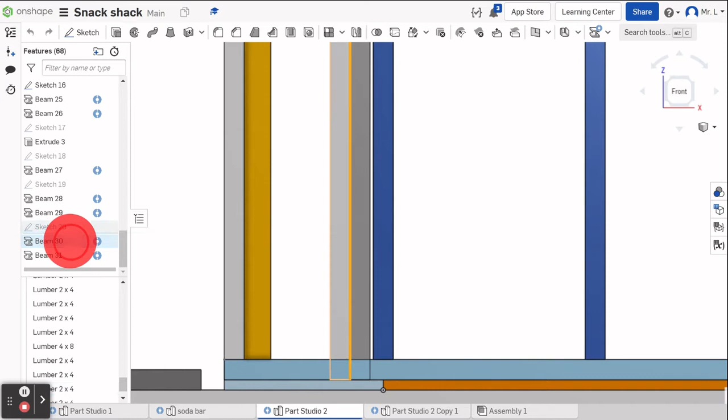So I think we can fix that by going over here and figuring out which beam. I'll go to beam 30, open that back up, and put trim, and click parts to trim to. Does this help having this red circle, or is that distracting? So parts to trim to, and we're going to trim to this part. Awesome, that did it. Green check.

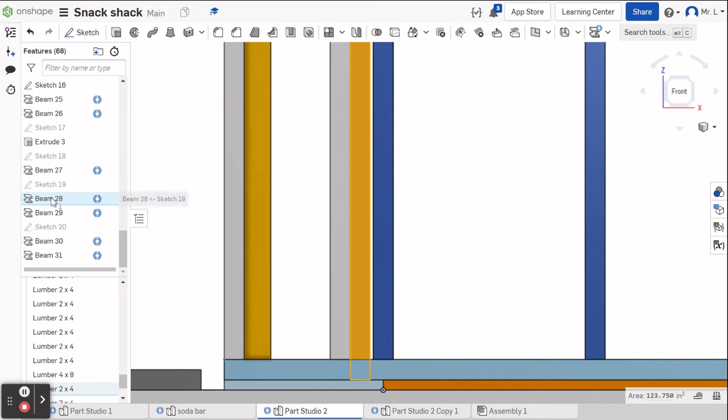So we're going to need to come to these beams at the end. I'm going to click on this one, and that is beam 28. We're going to double click on that, put trim and parts to trim to. You can either trim to a face or to a part. For this, it's easier just to trim to the part. So we're just going to click the part that we want to trim to. Green check. Let's see if there's any others.

Yeah, these two over here on this side need it as well. So we're going to click on that one, and that's beam 29, parts to trim to are going to be... trim, parts to trim to, there we go, green check. Last one here, what is this one, 31. We're going to double click on that, and once again click trim, parts to trim to, and green check.

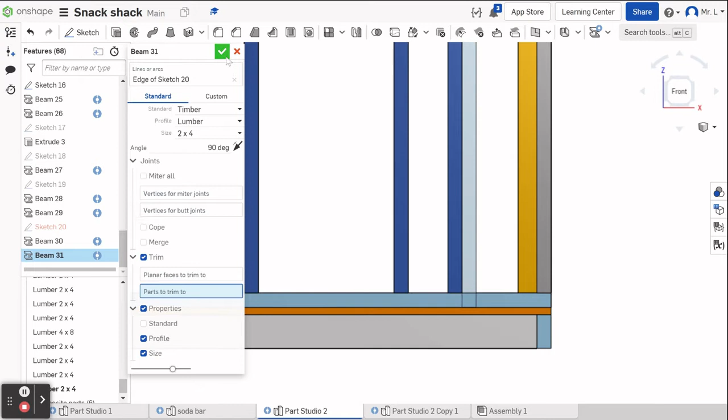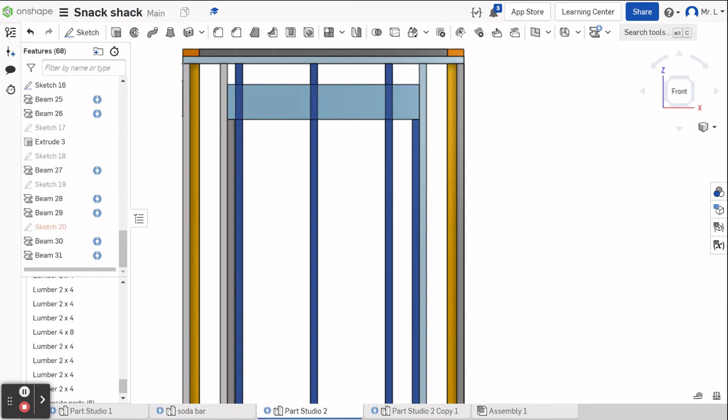Okay, so now if we look at this, we've got pretty much everything that we want here, but we are going to need to trim out everything... oh, this one didn't. All right, so click on that, which that's 31, trim. Oh, I didn't select the part to trim to. There we go. Green check.

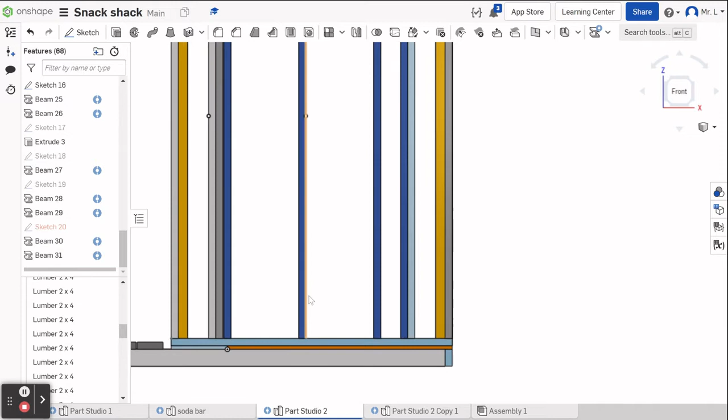All right, so now we need to get rid of these studs that are inside our door and the sill plate where the door is.

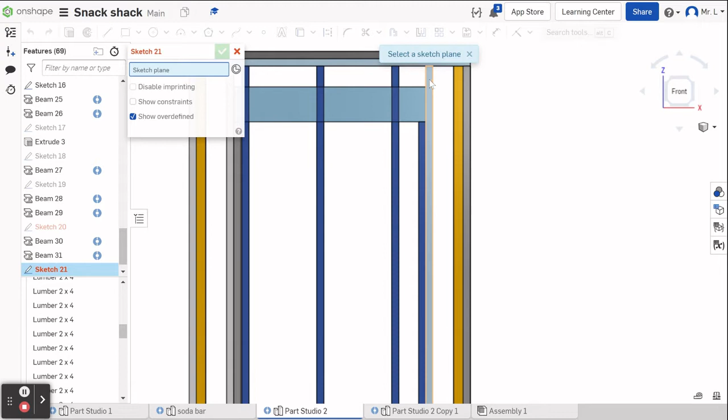So we're going to do another sketch, and I'm just going to do it on the face of one of these studs. It doesn't really matter which stud because they all should be the same. Then I'm going to do corner rectangle, and I'm going to go from this corner right here. I light up the edge of that stud and the top of my header, and I'm going to drag it down to...

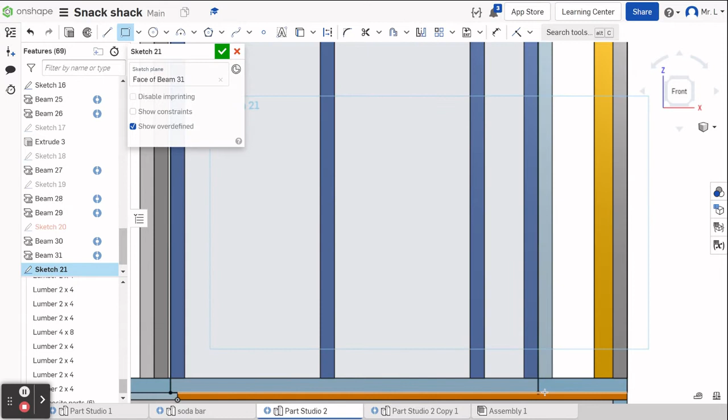I know all the scrolling in and out that I do, it's really difficult if you don't have a mouse, but I'm going to line that up so it's in line there, and then I'm attaching it right down here at the bottom, and then I'm going to go green check.

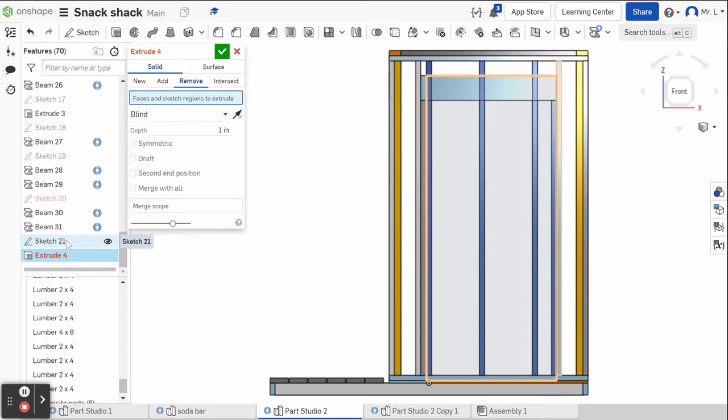And then I am going to, let's see, I get it centered here. So then I'm going to go up here and do extrude, and I'm going to go remove, and select sketch 21 so it does that whole block. Let's see which direction. Yeah, it's going the correct direction.

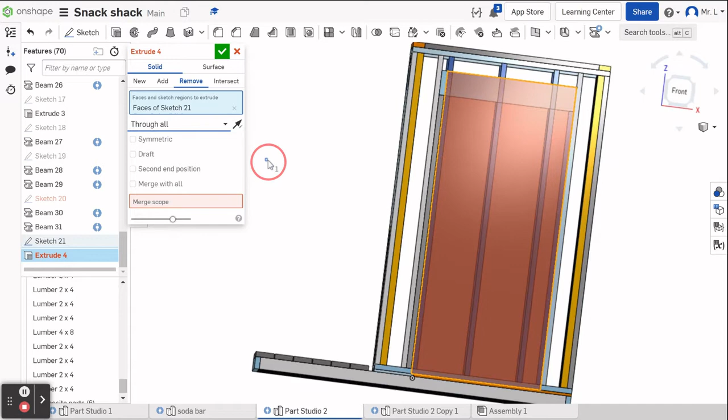Good. And I'm going to make it through all. And then I just have to select the pieces I want to trim out. So I click on merge scope down here, and I'm going to select this stud.

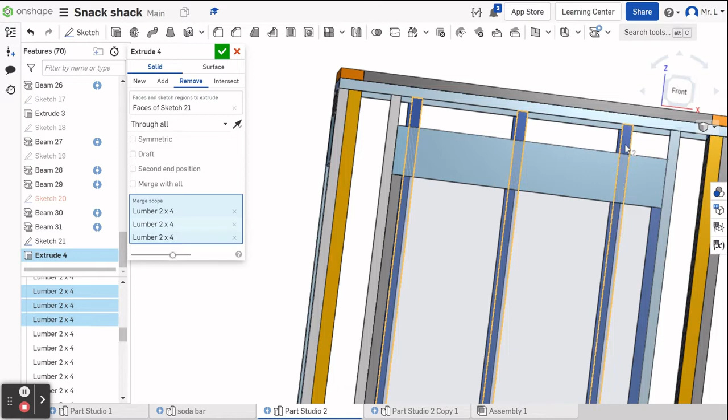Oops, that one didn't go. And this stud. And this stud. And bottom stud. I'm going to go green check.

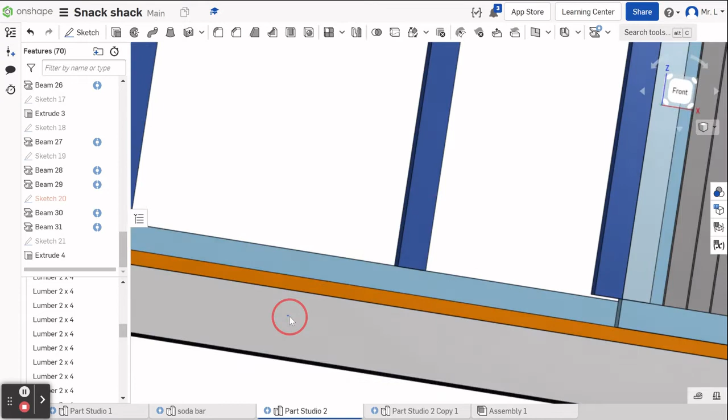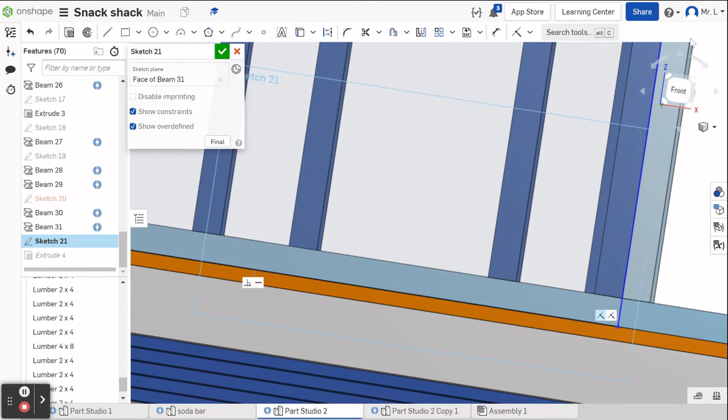And I made one minor mistake, which I'll fix by going up here to the sketch. Whoops, to the sketch again. I'm going to show constraints. I'm going to click on that horizontal constraint, and then make sure I'm looking at it square on. So I was looking at it isometric still.

So here's the problem. This stud here was supposed to stay, and so I trimmed it too far over. So I just need to move this over. The best way to do that would be, I think, take the coincident tool, click on that, and then click on this, see if that'll let me do it. Yeah, let me move it over. So I just constrained it to the other side of that stud because I had it on this side of the stud over here. I wanted it over here. So green check.

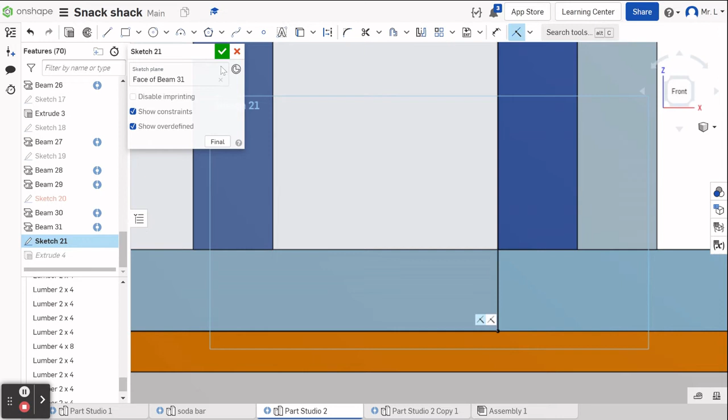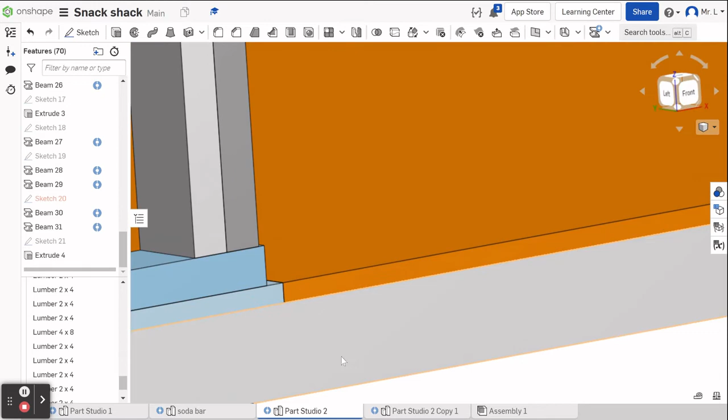All right, why is it not? Why are those studs showing up still? Oh, wait a minute. Oh, because I was looking at the ones on the back. So now if we look at it at an angle here, we have our... why is that? Come on.

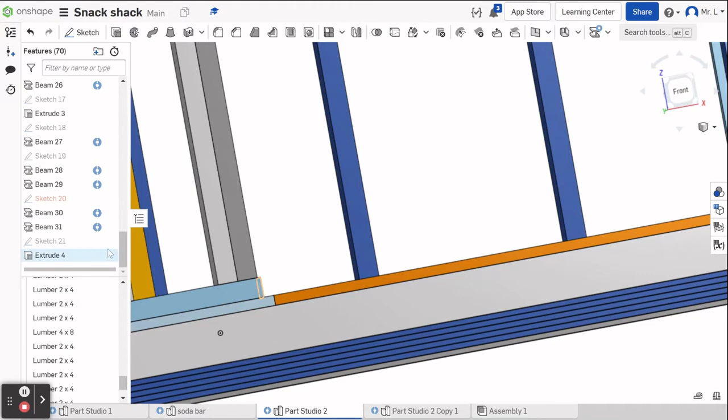So we got to go back in sketch 21. Apparently I attached it to the wrong thing up here at the top corner.

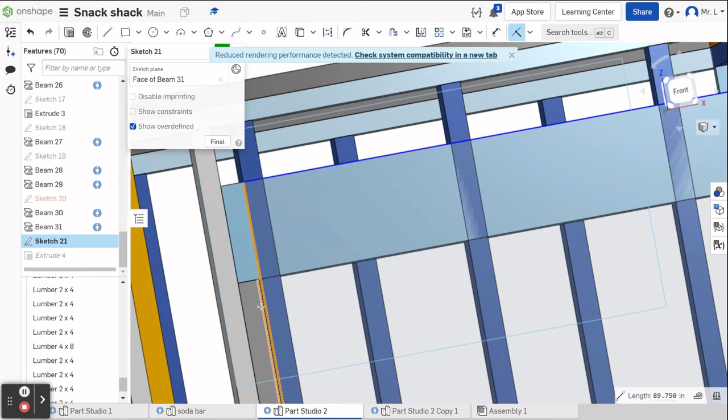So I'm going to get rid of that one, and then I am going to take my coincident tool. I'm going to take this edge and attach it to that edge. I'm going to have to take that corner and attach it to that corner.

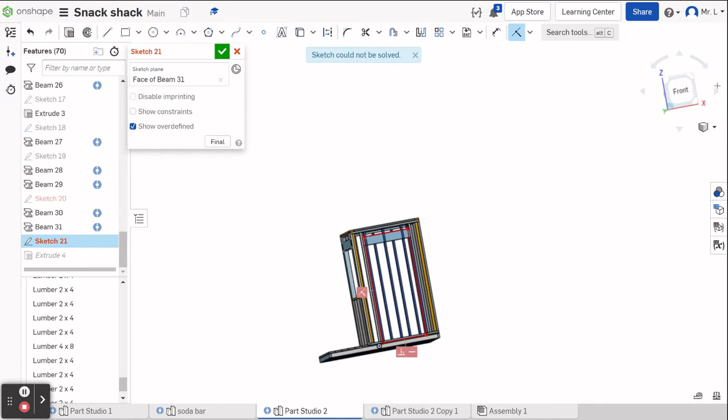You know what? It'd actually be easier if I just started this sketch over again, probably, for everyone. So to fix my mistake, we're just going to highlight everything in this drawing and hit the delete key, so it's gone.

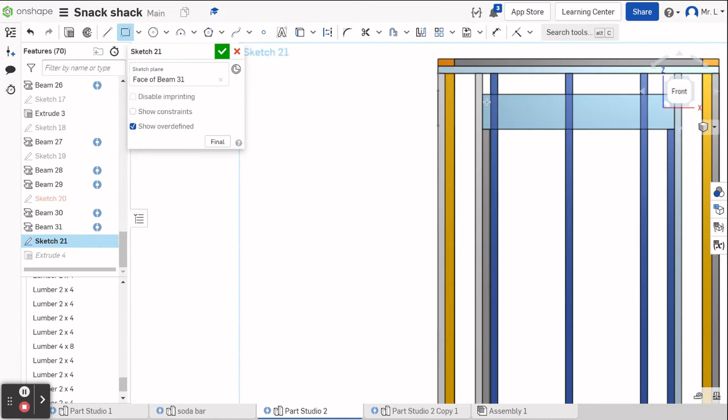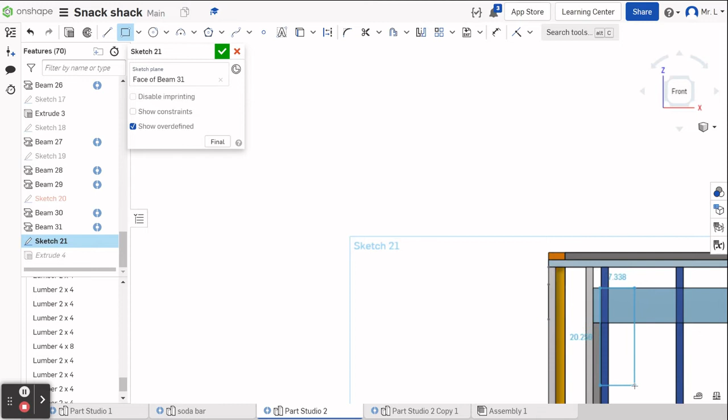Then we're going to take a corner rectangle, and I'm going to light up that edge there, so it's attached to the edge of the cripple, not to the edge of that stud that we're ultimately going to remove.

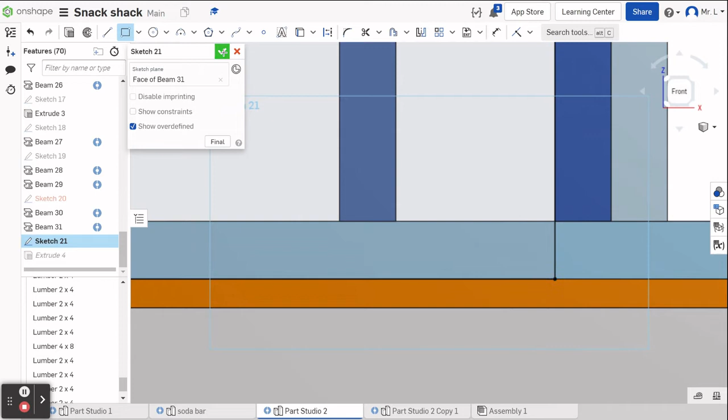And I'm going to come back down here, light up that edge, and bring it down to there, and green check. And my extrusion should still work. It did, and now I have it the way I want it.

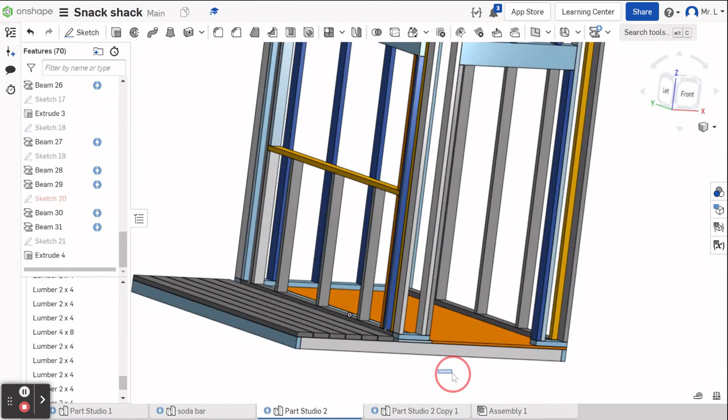See here, before this sill plate was coming out a little bit farther than what I wanted, and now that is trimmed correctly. So now we have our doorway. Okay, so we've got our doorway.

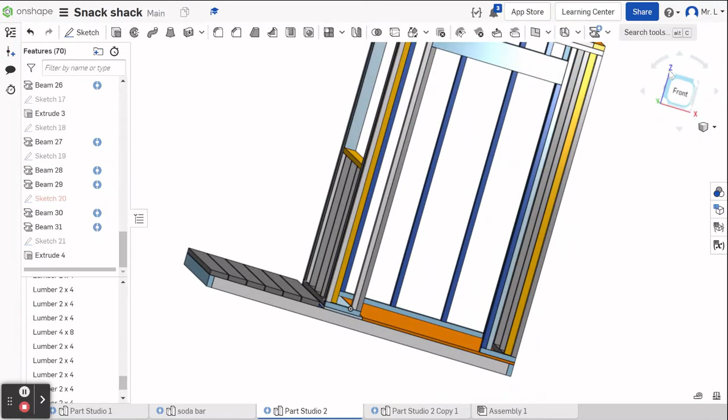Let's do our roof. Here's where it's going to get interesting, because I know how to do the roof if I were just doing it over this part, but we wanted to make it overhang the building and overhang that little porch.

Probably 2 pillars, one on each corner, huh? Yeah, yeah, do we want...

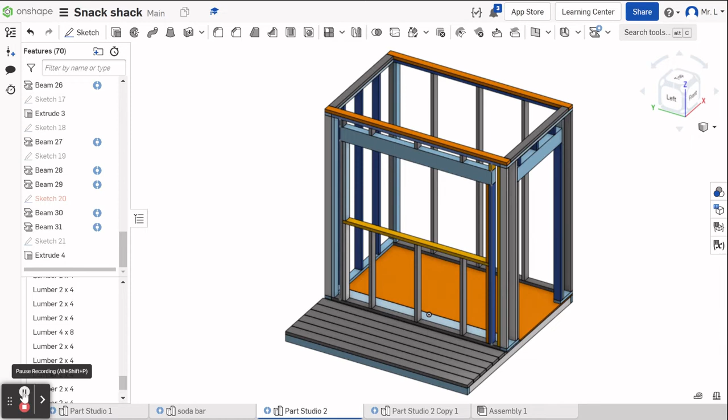Recording now. So we decided that we are going to have the peak running front to back on the shed, with the slope going towards the door on the side. With that in mind, part of what we're going to do is going to require some studs to be put on the outside of the shed, kind of like pillar type things.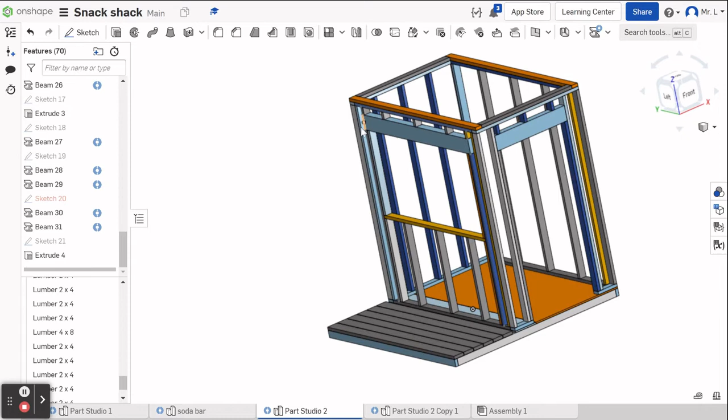So I think the next thing we want to do is put our siding on the shed, and we're using 4x8 siding. So we're going to go here and start on the front, I think, and we're going to go sketch—anywhere here on the surface will work.

Which direction did we go from on here? Well, actually on this, because it's 8 feet wide, it doesn't matter—we can start from either direction. So we're going to do a corner rectangle, start at the top, and go down here.

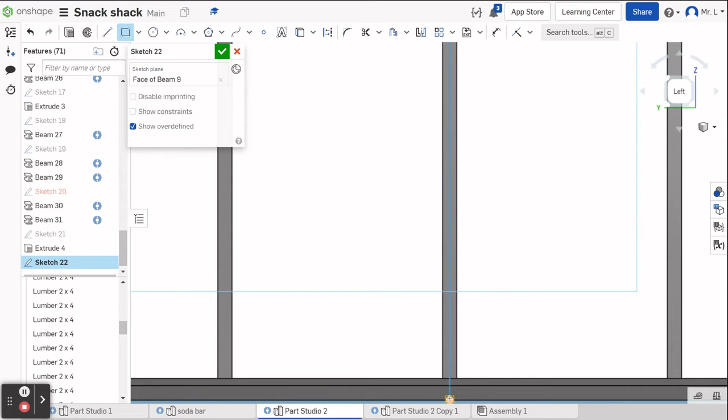And then we're going to do a second one here, that goes from the center to the bottom corner.

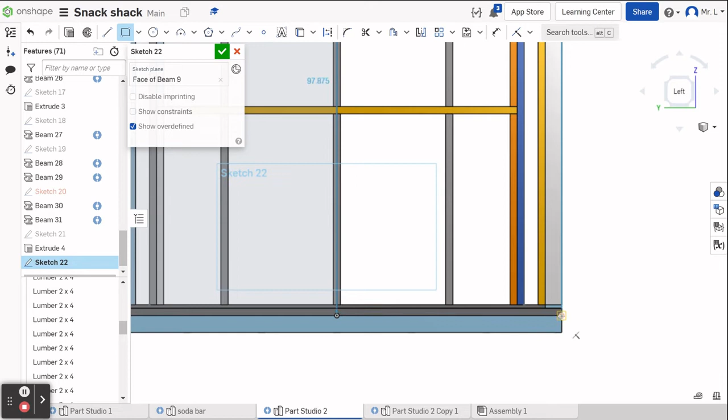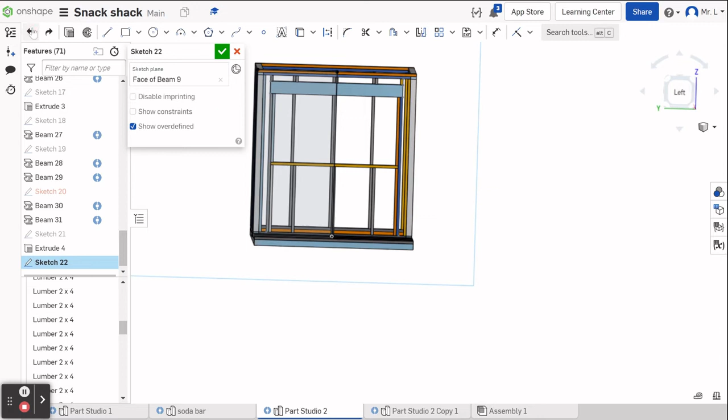Oops, so I messed up—it has to go above this wood here. So I'm going to click undo twice and get rid of those drawings, those sketches, those rectangles I just made.

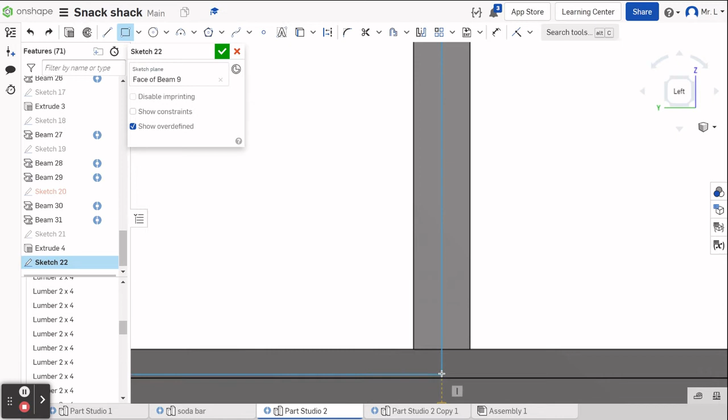Once again, I'm going up to corner rectangle. I'm going to go from the top, then come and light up the center, then attach that. Well, I'm going to go up a little bit like that, and take my coincident tool, click that bottom and then click there, so that's going to attach it.

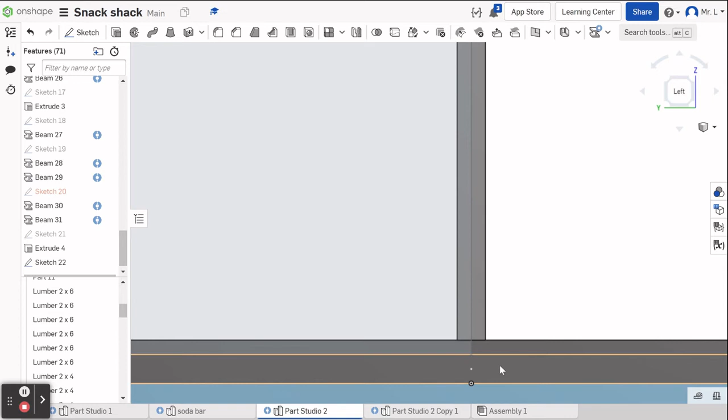The problem I had before is I took it down to the subframe, and on this back, where I need it to go is above, on top of the floor that's going to be on there.

Okay, so then I'm going to do another corner rectangle. Oops, did I do green check already? I guess I did—that's okay.

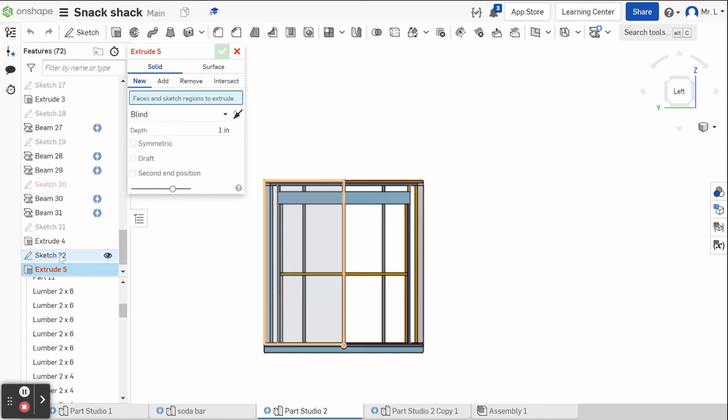So then we're going to go extrude. I'm going to click sketch 22 because I want all of sketch 22—it's going to be new. I want to make sure it's coming out away from the shed, which it is. And how thick is the siding? I think it's 5/8, but let me double check on that.

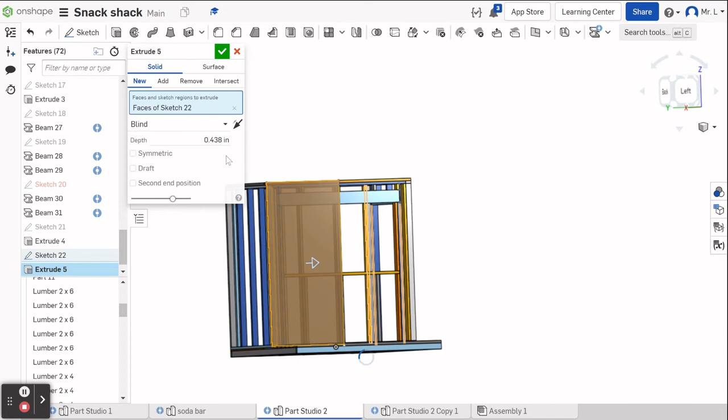The siding is 7/16. I'm going to go for my thickness here. I'm just going to use 7/16 because I don't want to look up the decimal and I don't remember what 7/16 is. So it's 0.438, and green check.

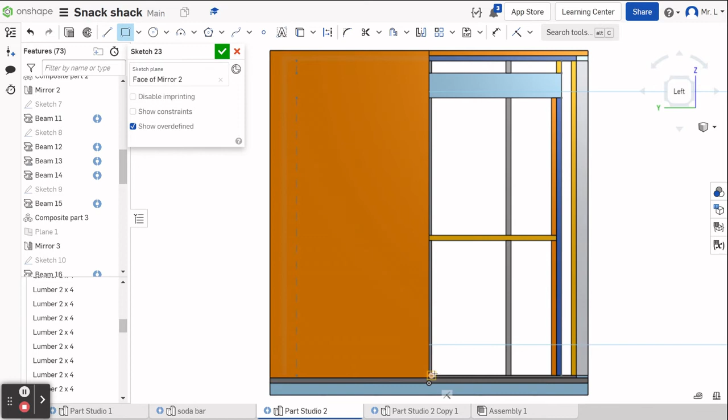So now I've got a piece of siding going across the front. I'm going to look at it from the front again and do another sketch. Any one of these beams is fine to select. Corner rectangle - I'm going to start at the bottom of that siding I just made, and go up to the top corner. Green check.

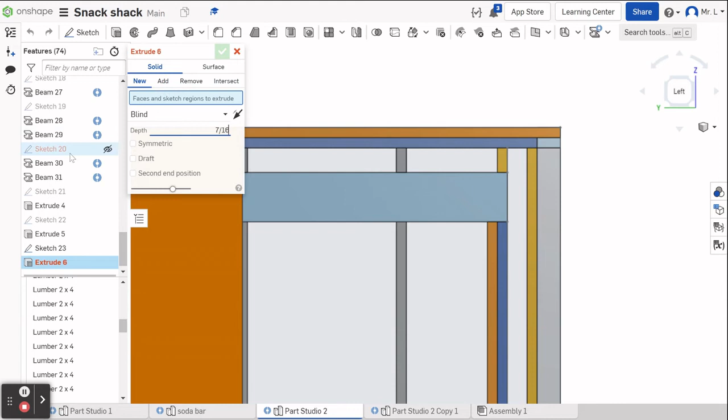Extrude. Seven sixteenths. And for faces, I'm clicking sketch 23, so it's all of that sketch. Green check. And we call it good.

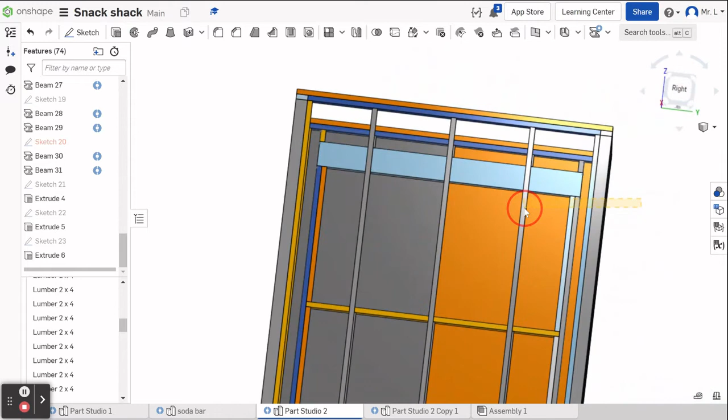Now here comes the challenging part. No, that's not going to work, so we're turning it around and looking at it from the back now. I'm going to do another sketch. I'll click the back side of this siding, then do a corner rectangle, going from the top corner of our front window to the bottom corner of our front window, and green check.

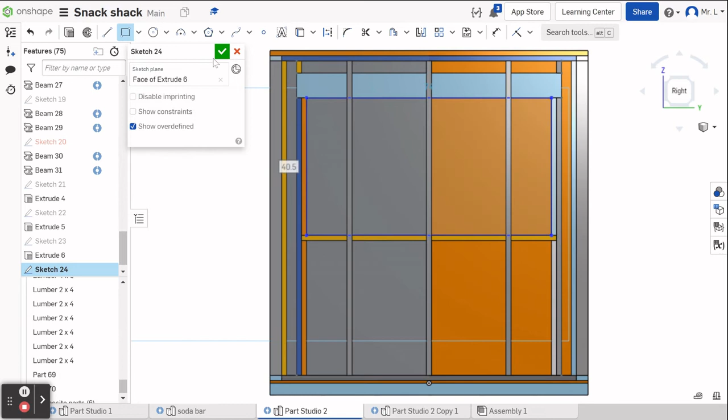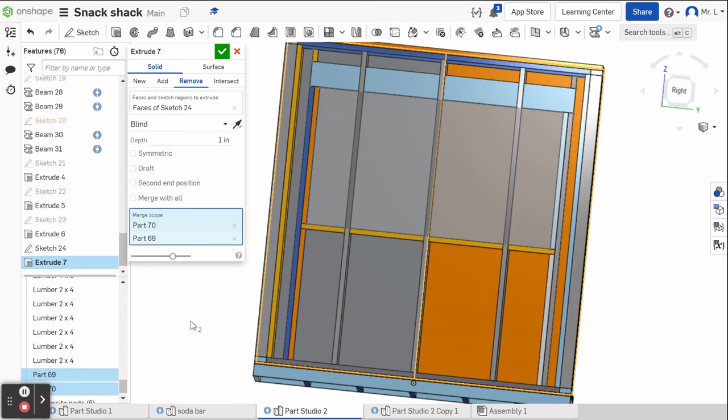Then I'm going to do extrude, remove, and make sure the face isn't sketch to extrude. I'm going to do sketch 24, just click on that so it automatically does all of sketch 24. Merge scope, I'm going to click the two pieces of siding. We're going to go green check, and now we have our siding with that window cut out.

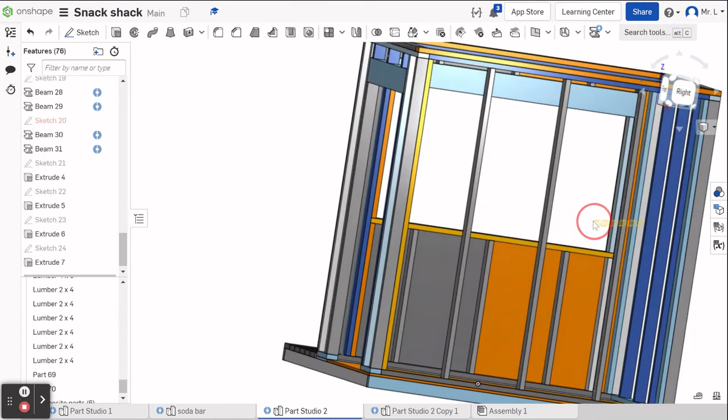Okay, next one, we are going to do the back. And so I would be able to mirror it, except I can't mirror. The only reason I cannot mirror the front to the back is because we started our siding above these, whatever you call them, above these floorboards.

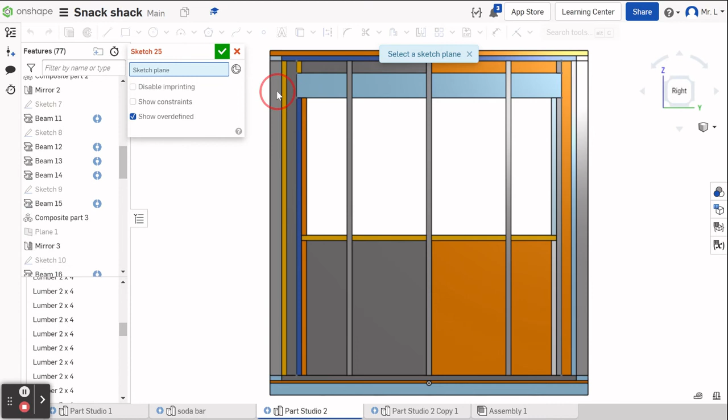So we're going to go around to the back. Actually, as I think about this, we could do that and bring it down when we actually build it, but I'm going to leave it for now. So we're going to go sketch. I'm going to pick any one of these back studs, then do my drawing.

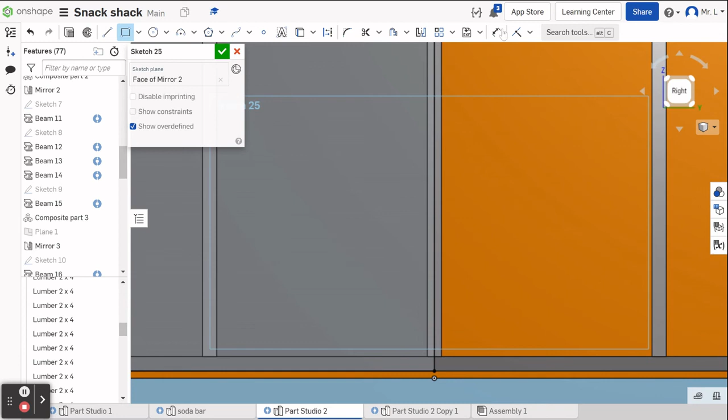And it's probably right there. I want to see what that is - dimension. Okay, so yeah, green check.

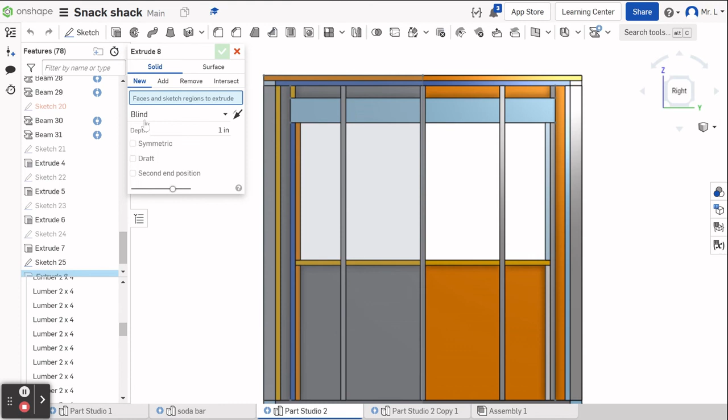All right, and then I'm going to do extrude. Sketch 25. 7/16. Make sure it's going out, which it is. So we're going to go green check.

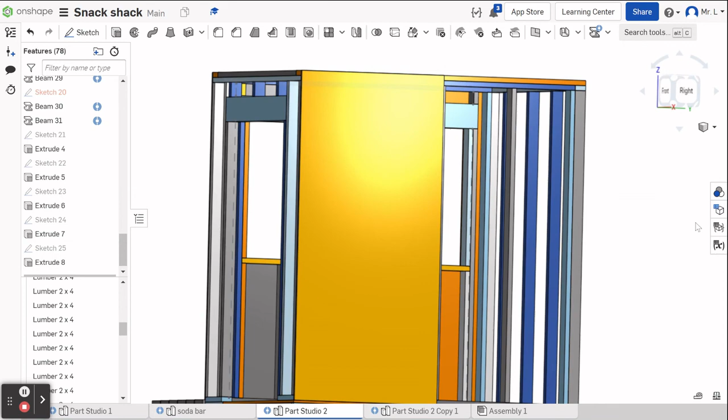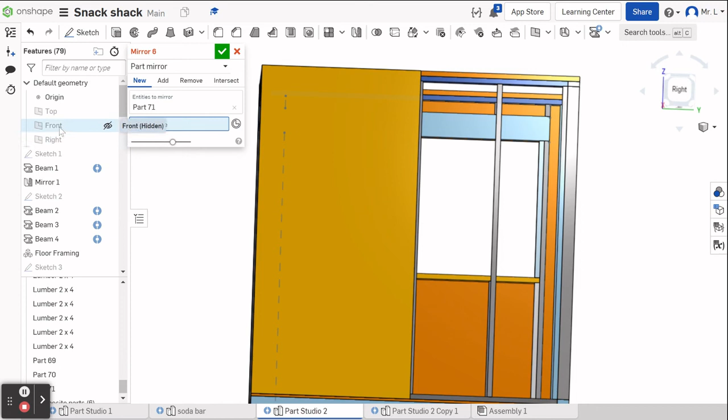And I don't know why I didn't think about this when I did the front, but we can actually mirror this. So I'm going to do mirror. Entities to mirror, I'm clicking this piece of siding, going all the way up to the top. I'm going to select mirror plane, and click front, I think is the right one. Is that? Yep. And we're going to go green check. So now I've got siding on the back.

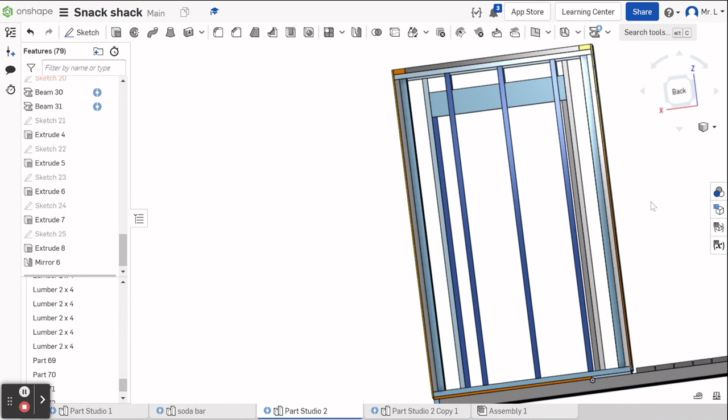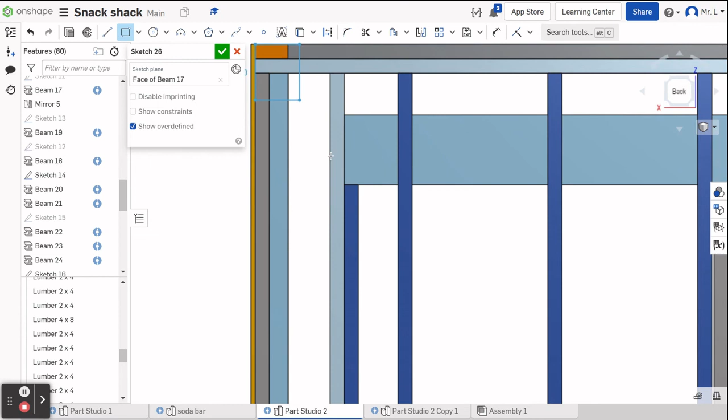So now we get to do the ends. Here's where it gets a little tricky because we are going to have to use two pieces of siding for this. So we're going to do sketch, pick any one of these end pieces, and then do a corner rectangle tool. We're going to go up here to the top corner, and then come down here to this center point.

Holy crap, a mouse just ran across my desk. A mouse - no, dead serious. All right, let's pause the recording.